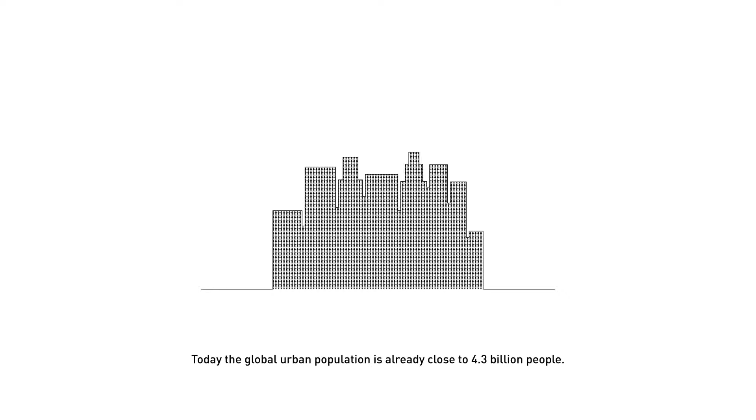2010 marked a milestone in modern urban history. More than half of the global population were living in urban settlements, meaning every other person on the planet was living in a city. Urbanization is not slowing down. The UN predicts that by 2050 the number of urban dwellers will have reached nearly 7 billion people, meaning 7 out of 10 people will be living in urban environments. Today the global urban population is already close to 4.3 billion people.

But the fastest growing urban environments are not skyscraper cities or suburban housing developments. It is slums: self-built, informally planned, citizen-made urban settlements growing on the outskirts of our major cities at a shockingly fast rate. These areas are already home to a striking 25% of the urban population worldwide, meaning 1 out of 4 urban dwellers lives in an area defined by the UN as a slum. These areas are spread across the globe, with a majority in third world countries.

The UN predicts that by the beginning of 2050, a third of the global population will be living in slums. Finding solutions to improve these informal urban settlements might very well be the biggest urban challenge of the 21st century. It is of the highest importance that designers, planners, and architects work globally to create a better environment for these people.

Simultaneously, we see the growing impact of the digital revolution in our environments as the world enters the era of Industry 4.0. Modern cities are turning into giant machines for harnessing digital information and data, sharing knowledge, resources, and assets on a whole new level. This new idea of sharing and instant access to goods and information has sparked the beginning of a new economy: the sharing economy. Could design and technology be joined together to help secure sustainable development of these exposed urban environments?

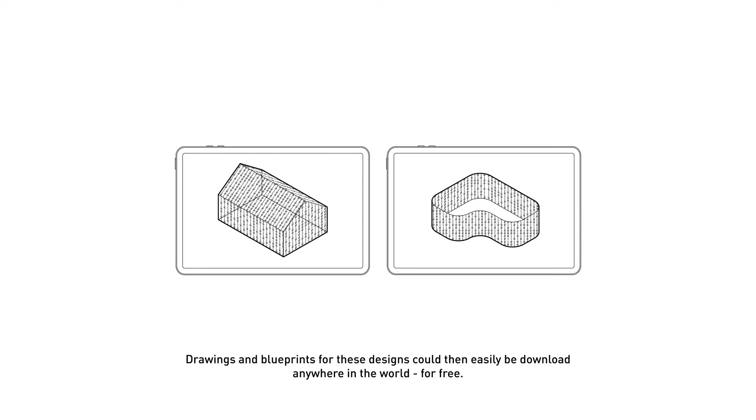Inspired by the work of Creative Commons, WikiHouse, and Icon 3D printing, with the possibilities of the digital revolution and our ability to share information and data, instead of production happening in mega factories and then being shipped all over the globe, design and architecture can be shared digitally through open source. Following these new ideals of the sharing economy, it could be made available to billions of people worldwide. Drawings and blueprints for these designs could then easily be downloaded anywhere in the world for free.

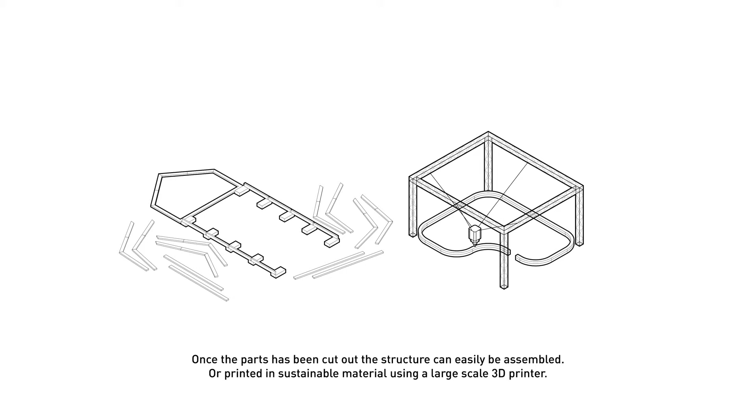With the help of modern technology like 3D printing and CNC milling, these buildings can be manufactured locally, in many cases using local material and building techniques. Once the parts have been cut out, the structure can easily be assembled, or printed in sustainable material using a large-scale 3D printer. The assembly process is fast and straightforward, making it easy to construct without much previous knowledge.

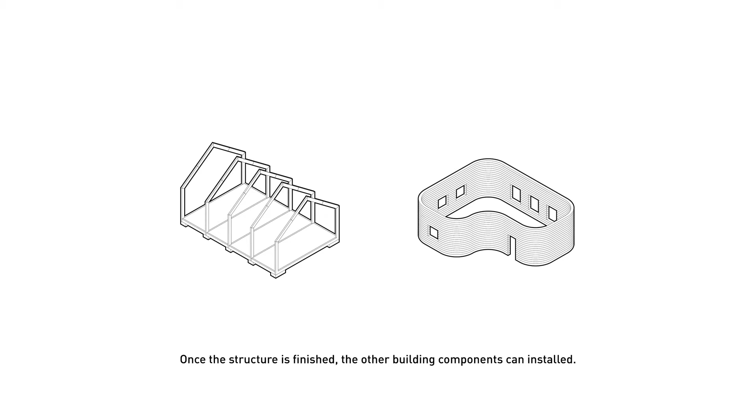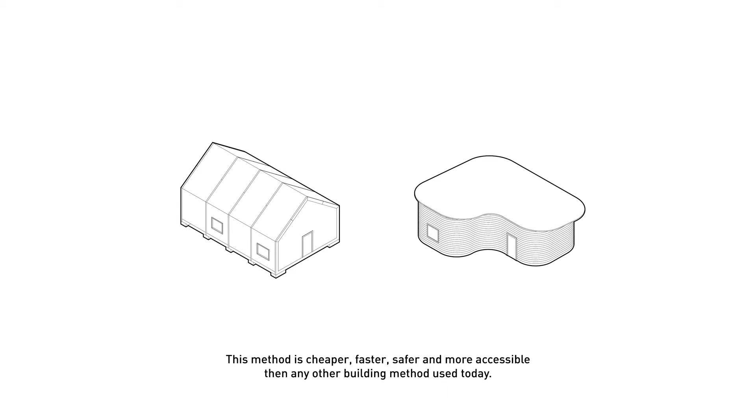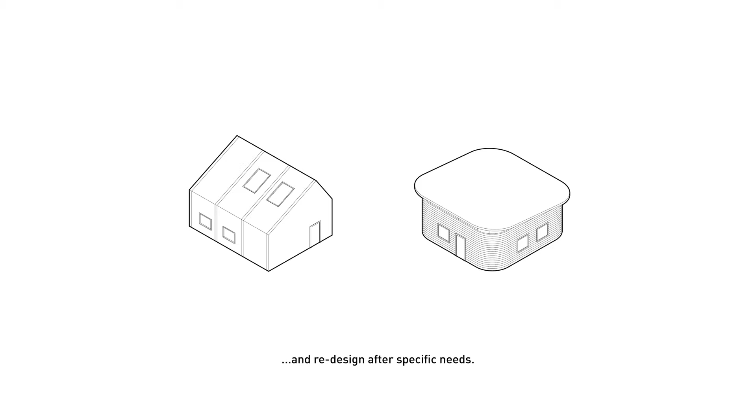Once the structure is finished, the other building components can be installed: walls, ceiling, windows and doors are mounted onto the finished building structure. This method is cheaper, faster, safer, and more accessible than any other building method used today. And things become really interesting when individual citizens take a simple design and redesign it after specific needs. These new designs can then be uploaded back onto the open source network and made available to billions of other people.

Since 1975, the price of solar panels and green energy has dropped drastically, leading to an increasing number of people producing their own green energy. Predictions even say that the price of solar panels is likely to drop to a point where the marginal cost for producing energy will be basically zero. Individuals could then produce unlimited green energy by themselves for free.

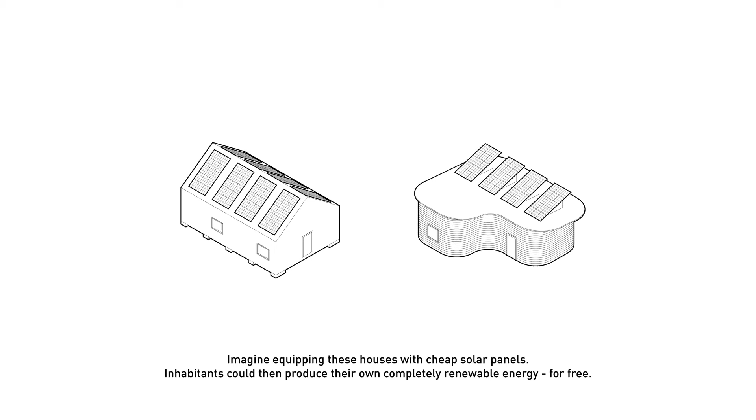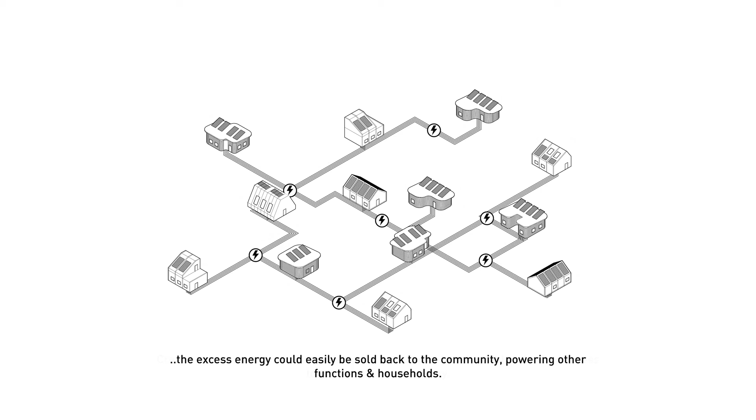Imagine equipping these houses with cheap solar panels. Inhabitants could then produce their own completely renewable energy for free. And if the houses were then connected back onto a power grid, the excess energy could easily be sold back to the community, powering other functions and households, creating a community of affordable, safe, sustainable housing with unlimited access to renewable green energy. Bridging architecture and design through technology to sustainable, meaningful, and secure development of these areas is essential in the fight against rapid urbanization and the exponentially growing urban informal settlements.